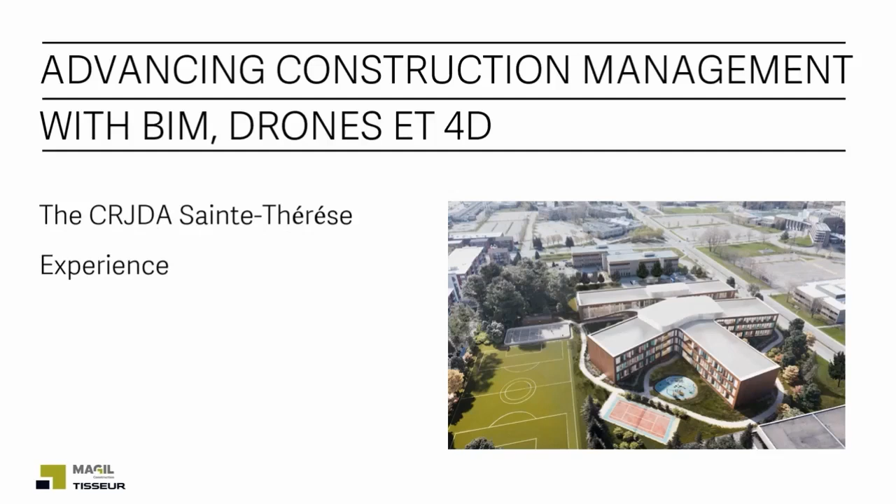Before starting, I'd like to introduce myself and my company. My name is Federico. I am currently the Vice President of Technology for Fayolle, a construction group which owns several construction companies. One of these is Magil Construction, our general contracting and construction management company. Magil was founded in Montreal in the 50s by Louis Magil, an immigrant from Eastern Europe. Over the years, we participated in the construction of a good part of downtown Montreal, as we can see in this map.

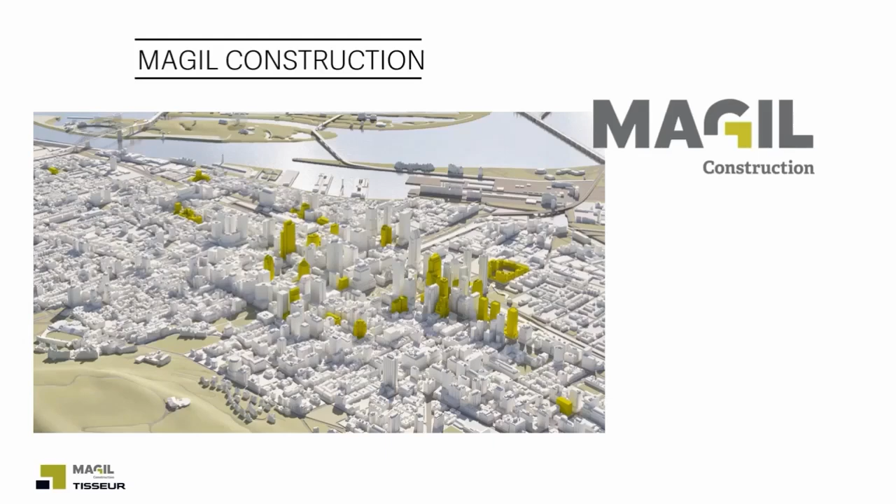Since Fayolle's acquisition, we've been expanding and now have offices in Ontario and BC. For this project, Magil partnered with Tisseur, forming a joint venture that allowed us to combine our expertise and tackle the unique challenges of the CRJDA Sainte-Thérèse. Tisseur is a Quebec-based contractor and shares many similarities with us — our values, our approach to construction, and even many of the same digital tools. However, their strong infrastructure expertise made them the perfect partner for this project, complementing Magil's strength in complex building construction.

This partnership is not a one-time collaboration. We already have several joint ventures on the way and anticipate even more in the future. In today's construction industry, where projects are increasingly complex and large, joint ventures are becoming a necessity, allowing companies to pool resources, share expertise, and expand their capabilities to take on more ambitious projects.

Let me say, however, that our joint venture is more than just the sum of two companies. It is a true collaboration, an example of how two firms can integrate their knowledge, tools, and best practices to deliver something truly exceptional. The CRJDA project is a testament to this, a project that neither of us could have executed as effectively alone, but was made possible through this partnership.

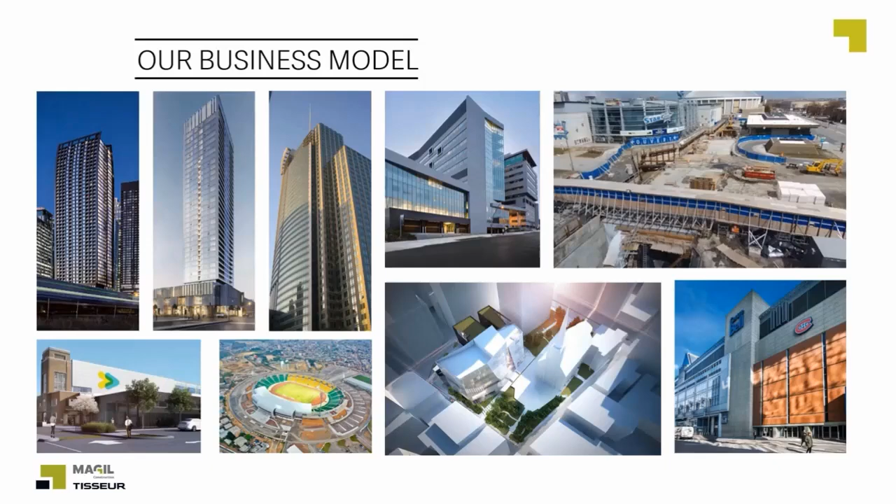So Magil does not own facilities. We don't own equipment, heavy machinery, materials. Our assets are instead knowledge and expertise, which are held by our people, either our employees or the companies we work with to execute our projects.

This is important in order to understand our vision for technology in construction. A construction project is not the product of a single company. It is the success of a team made up of dozens of companies, clients, consultants, subcontractors, suppliers, specialists. As a construction manager, our role is to act as the conductor of an orchestra, ensuring that all these different players are aligned and moving toward the same goal. That's why, for us, technology is about helping people to communicate, collaborate, coordinate. It's about giving teams better tools to understand the project, anticipate challenges, and make informed decisions.

Consider that construction is fundamentally different from manufacturing. In a factory, the prototype and the final product are identical — you test, adjust, and then mass produce. In construction, there is no prototype. The first time we build something is also the last. Every project is unique, every site is different, and every schedule has its own constraints. This introduces inherent risks that cannot be eliminated, but they can be managed.

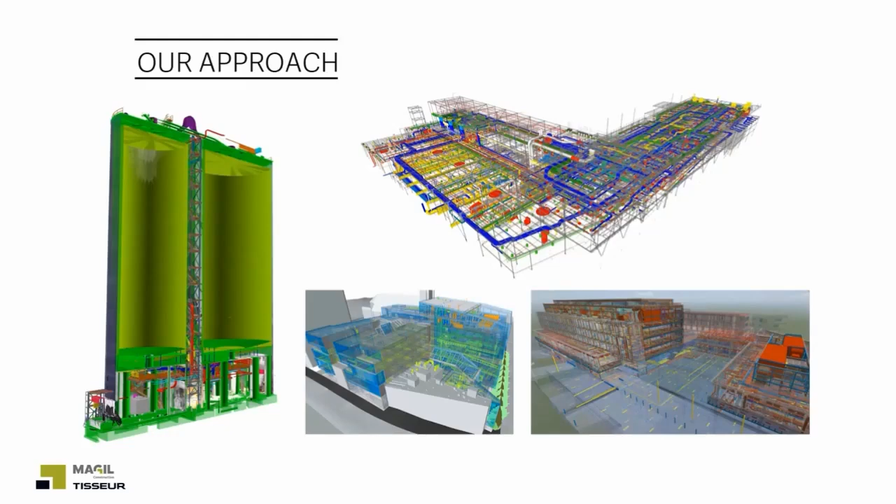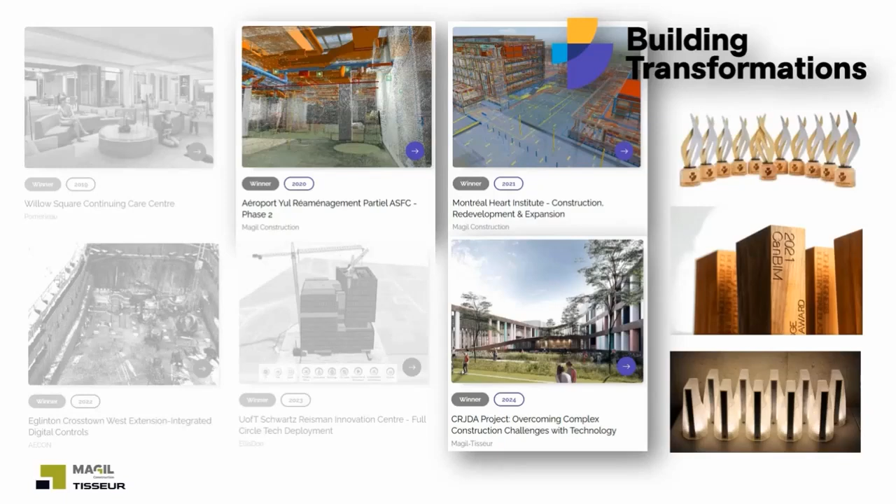Over the past 5 years, our commitment to advancing construction management has been recognized at the national level. We have earned 5 nominations and 3 wins at the Spotlight Innovation Award presented by Building Transformations in the category of construction management. This year, our work on the CRJDA Sainte-Thérèse project earned us this recognition once again. So let's now dive deeper into what made the CRJDA project stand out and how we implemented these innovative methods on site.

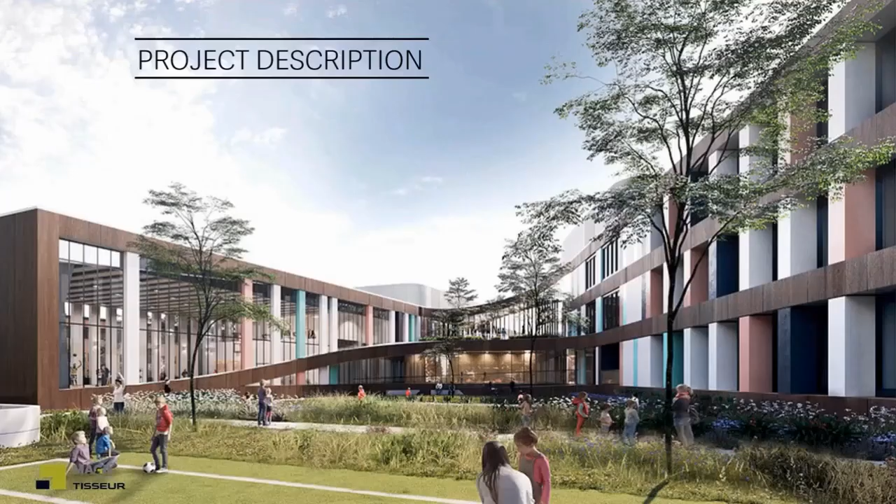The Centre de réadaptation pour jeunes en difficulté d'adaptation, CRJDA, de Sainte-Thérèse, is a 12,000 square meter rehabilitation center designed to provide a safe and structured environment for youth aged 6 to 17 facing adaptation challenges. The facility includes 9 residential units, classrooms, multi-purpose spaces, a gymnasium, an art studio, and outdoor recreational areas such as sports fields, gardens, and themed play modules.

This project is more than just a building. It is a place of transition and rehabilitation designed to support youth in their development. The architecture was conceived by ACDF, whose artistic vision focused on soft, welcoming forms that avoid an institutional feel. The building features curved structures, warm materials, and a strong connection with nature, creating an environment that promotes well-being and reintegration.

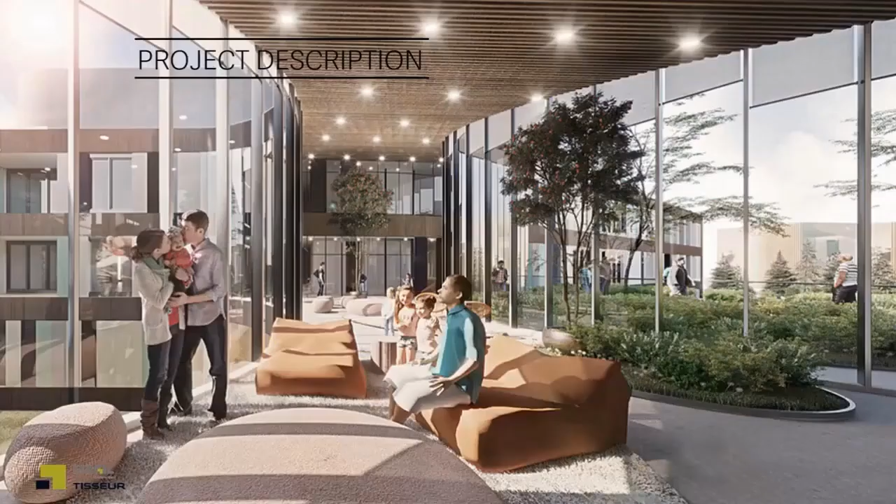The client, Société Québécoise des Infrastructures, SQI, in partnership with the Centre Intégré de Santé et des Services Sociaux de Laurentides, opted for a design-build contract for this project. This approach was chosen to ensure faster delivery, cost control, and better integration between design and execution, allowing flexibility in adapting the evolving needs of the facility while maintaining a strict schedule and budget.

One of the most significant challenges was the fast-track nature of the project. Construction began while parts of the design were still being finalized, meaning that excavation and foundation work were already underway while upper floors and other sectors were still being developed. This required constant coordination and flexibility to adapt as the project evolved.

Another challenge was the fact that, unlike a typical building with repetitive floor layouts, the CRJDA features curved forms and highly customized spaces. There are no standardized floors, and almost every section of the building required a different approach. This architectural complexity made traditional coordination methods ineffective, requiring an advanced BIM-VDC strategy to maintain alignment between the trades.

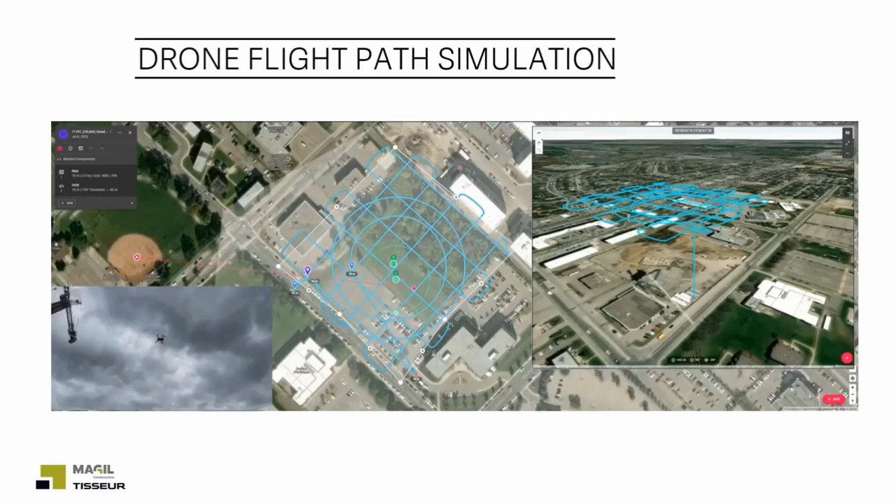Now, having drones capturing site data is one thing. Ensuring precision and consistency in every data set is another. That's where ground control points, or GCPs, came in.

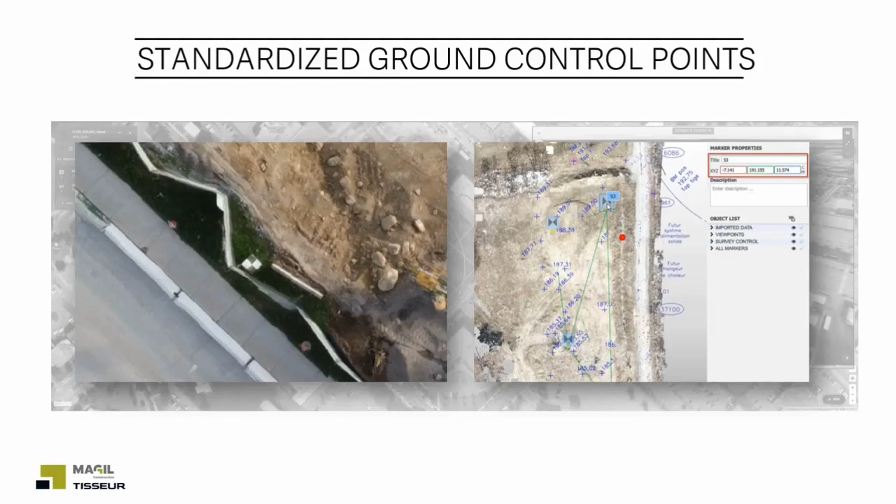We fabricated concrete mounted markers installed at fixed locations across the site. Each marker was surveyed once at the beginning and never moved. Now every drone flight was automatically georeferenced, ensuring that all datasets aligned perfectly with the BIM model. This meant that we could automatically compare new drone data to previous site conditions, integrate excavation levels and structural elements with BIM models quickly, and ensure high precision without additional surveying for every flight.

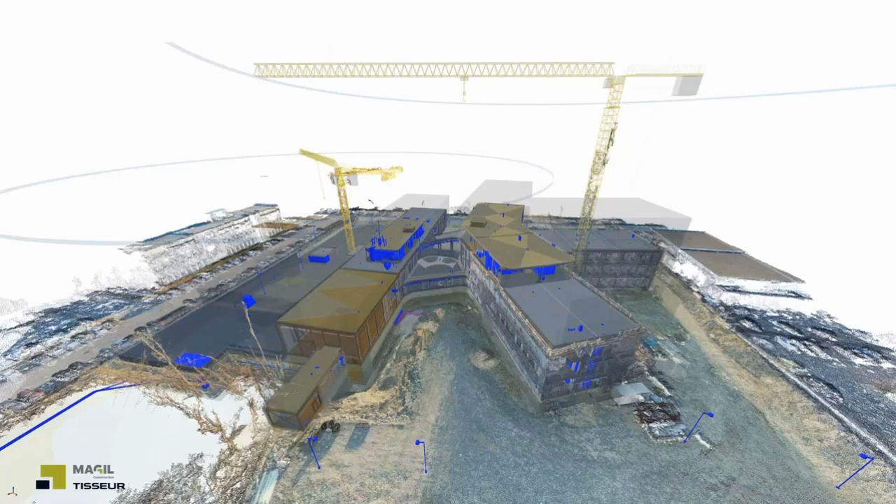Once we established a consistent georeference dataset, we integrated drone surveys directly into our BIM workflows. Every drone flight was automatically overlaid onto the federated BIM model. Excavation levels, foundation, and structures were identified against design models in real time. Potential issues, misalignment, or delays were flagged quickly.

Once drone flights were integrated into our workflow, we processed the data in a dedicated software to generate photogrammetric point clouds. This allowed us to calculate excavation volumes with precision, preventing disputes over quantities. Monitor excavation profiles and ensure alignment with design specifications, among other things.

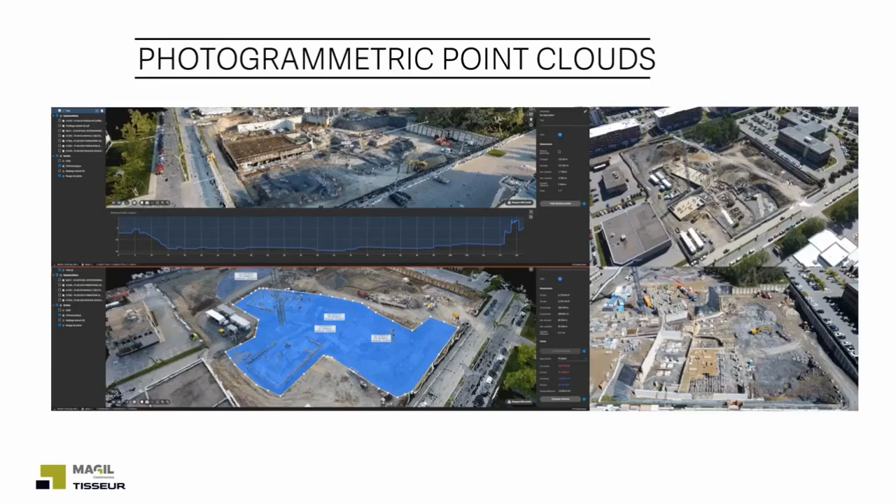We can see here on the right, two aerial views showcasing the progress of concrete foundation works. This highlights the scale and complexity of the foundation phase.

The next step was ensuring that excavation met the exact design specifications. On the right here, you see a snapshot of surveyed excavation levels. And on the left, a 3D mesh model was generated, showing the actual rock layer elevations, which ended up being, as always, different than what was expected. This was critical for verifying contractor quantity claims and ensuring fair compensation.

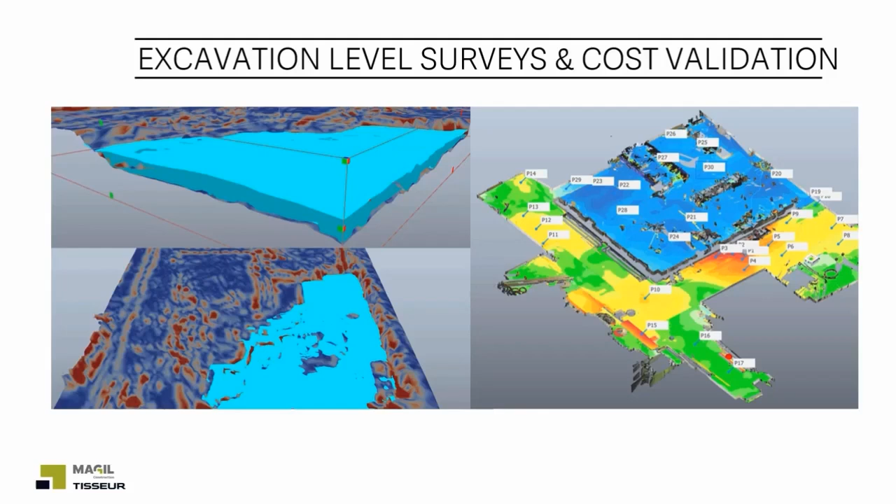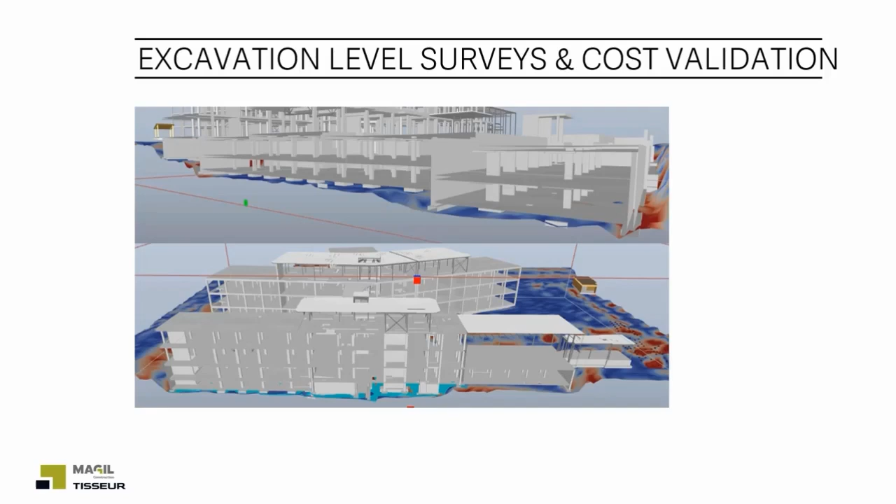Here we take the process one step further. This image shows the federation of excavation data with the structural BIM model. This ensured that structural elements were aligned with the excavation footprint before concrete work began.

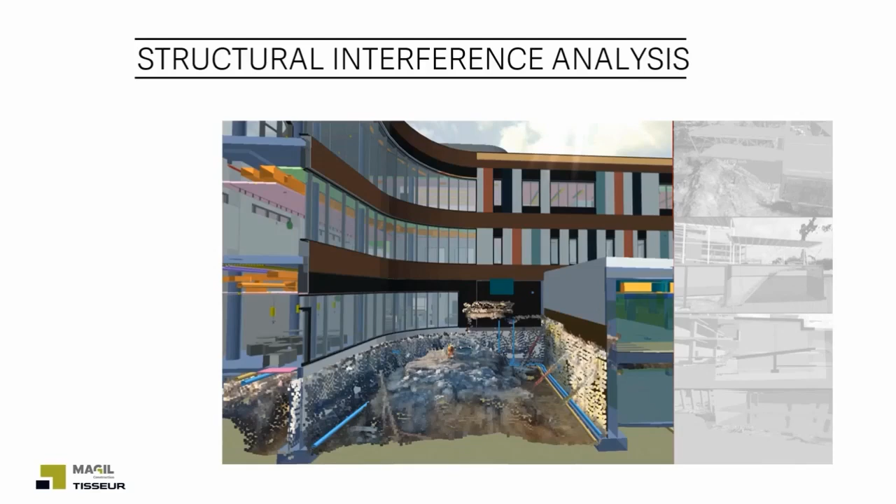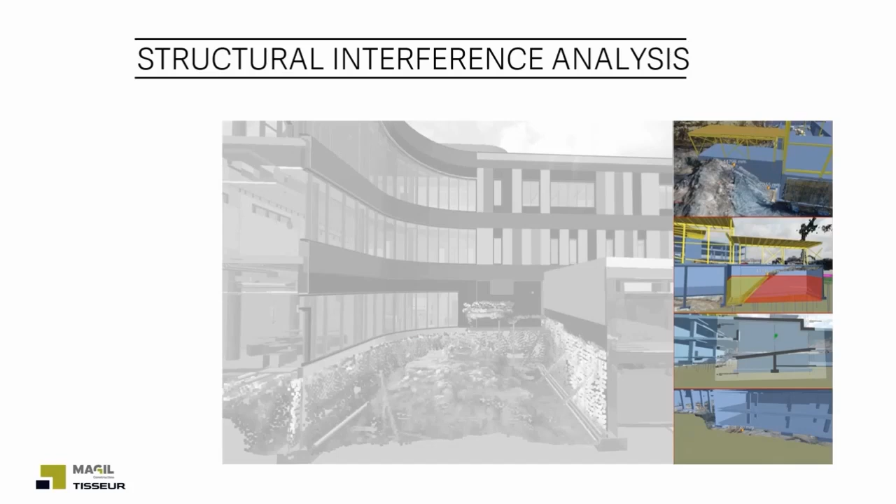In this slide, we see a fully integrated dataset where drone-generated point clouds were automatically aligned with the federated BIM model. And in the right section, we show several examples of actual applications, such as excavation slope verification to ensure safety compliance and excavation depth interference checks.

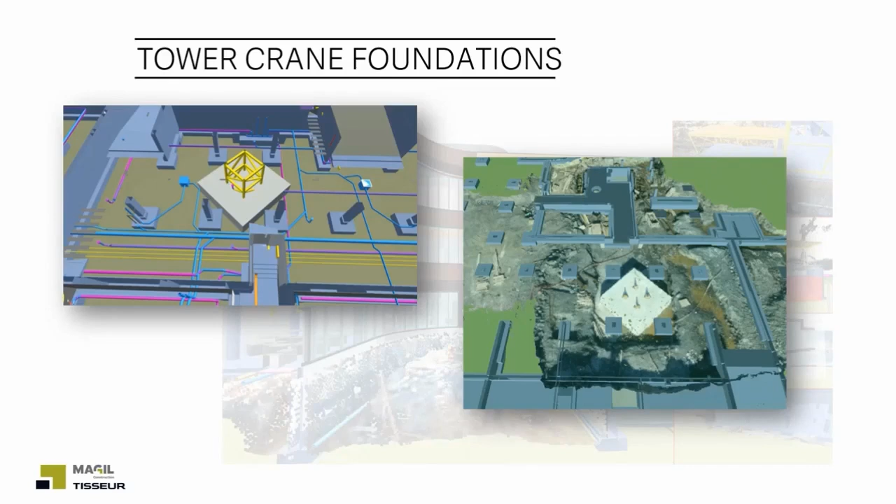A unique challenge in fast-track projects is the need for temporary structures before the final design is complete. This slide shows an example of this challenge. The tower crane foundations were integrated into the BIM model. The drone surveys ensured that placement did not interfere with the final structural elements. Using this method, we ensured that temporary structures supported ongoing work without impacting long-term construction.

One of the most complex integrations in this project was the coordination of 142 geothermal wells. The geothermal system maintains inlet water temperatures between 10 and 15 Celsius degrees, delivering long-term energy savings. This slide shows how drone imagery and 3D modeling ensured proper design and placement. Each well, 6 inches wide, 200 meters deep, was accurately positioned to maintain optimal efficiency.

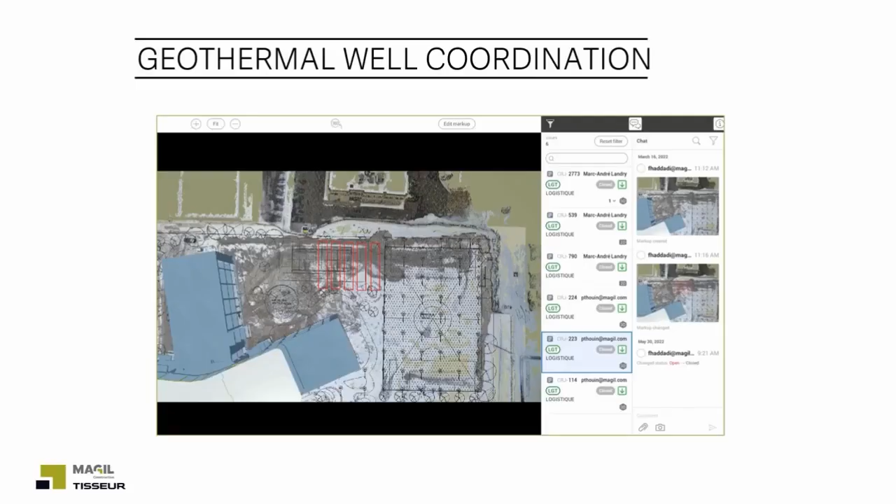Another great example which shows how powerful and cost-effective the use of BIM and drone imagery is, is the under-slab coordination, which is often poorly designed and coordinated. Design updates were directly integrated into the collaborative platform, allowing for rapid execution adjustments. With these tools, we ensured that all underground utilities and slab mechanical systems were accurately placed before pouring concrete.

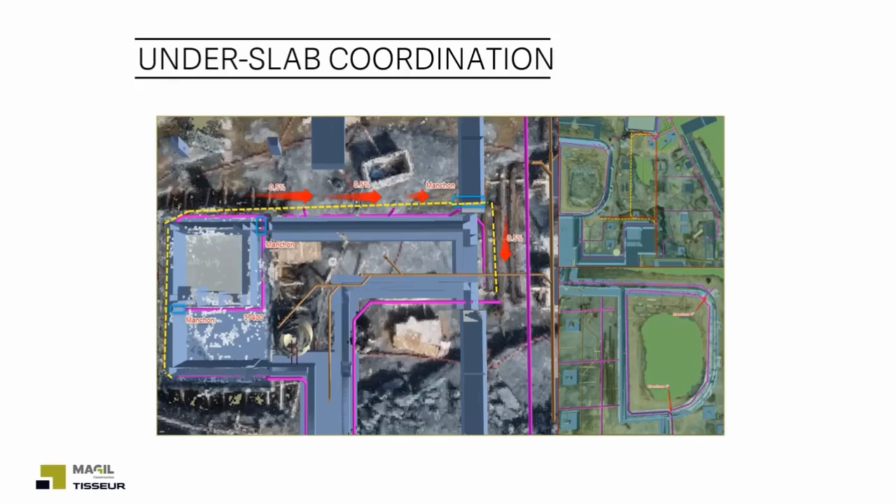Beyond visualization and coordination, drone surveys played a major role in verifying completed work for invoicing and payment approvals. In this example, the highlighted red areas indicate tracked foundation progress, with each update providing a clear time-stamped record. This eliminated disputes regarding quantities completed versus quantities invoiced, and ensured subcontractors were paid based on accurate progress tracking. By having aerial validation of foundation and structural phases, the project team improved client-contractor relationships, avoiding unnecessary delays in approvals.

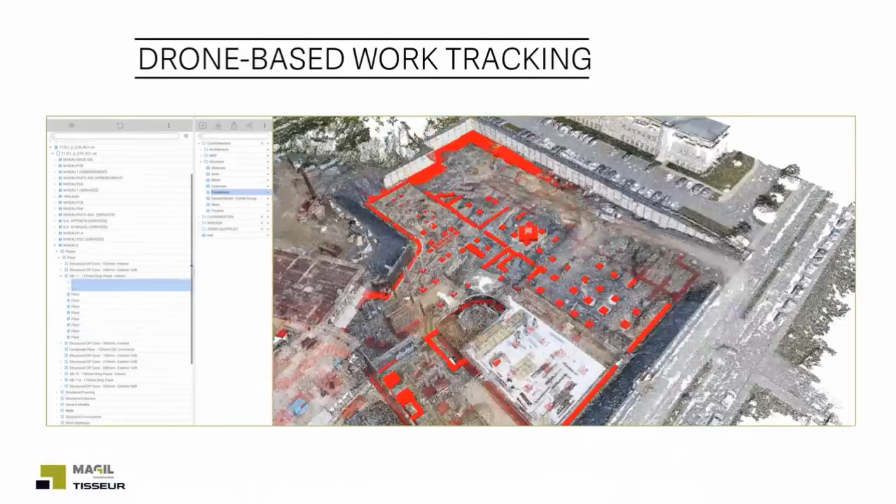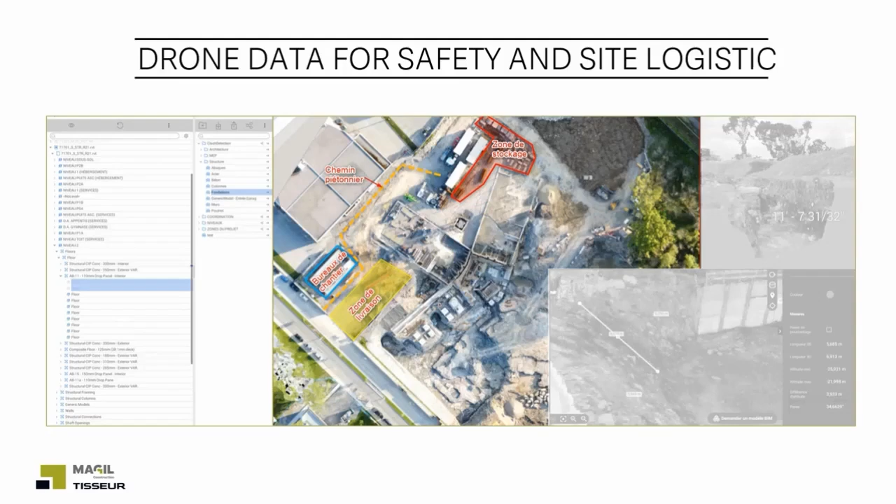In addition to coordination and progress tracking, drone data was heavily used for safety compliance. The safety team used drone surveys to verify excavation slopes, ensuring compliance with regulatory requirements. Moreover, the safety team leveraged high-resolution orthomaps captured by drones to better collaborate with the site logistics team, and ultimately to better communicate site setup, access paths, and potential hazards to stakeholders.

But managing logistics and equipment movement on fast-track projects requires more than just good coordination. It requires precise simulation and planning. We used a separate, dedicated collaborative 3D platform to simulate logistics milestones such as concrete pump reach, circulation paths, and safety zones. By testing different setups, we minimized disruption to surrounding areas while maintaining safe operations. This allowed crews to anticipate site access constraints and optimize pump placement before operations began.

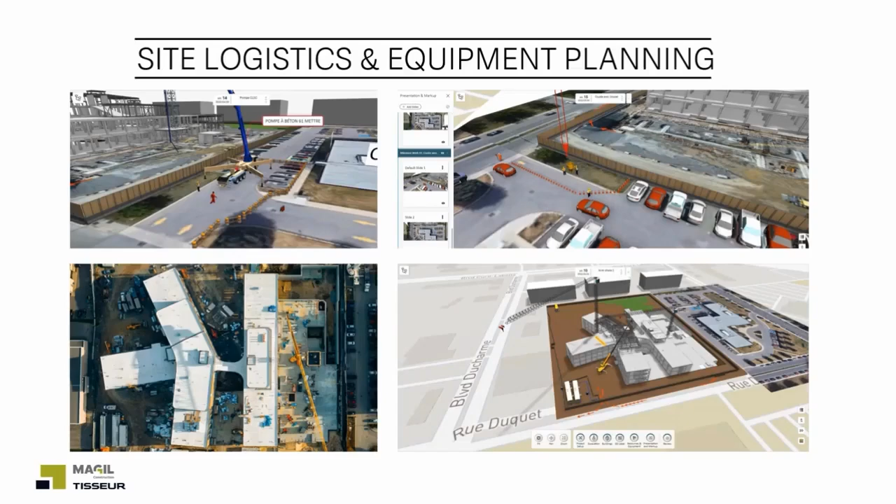Again, mobile crane coordination for the steel canopy installations, ensuring safe lifting zones. The ability to visually communicate crane operations to all stakeholders significantly improved coordination.

Here you see an aerial view showing simultaneous structural envelope and interior works. As I mentioned before, these fast-track projects required multiple activities to run in parallel. Concrete structure was still progressing while envelope installation began. Interior work started in completed sections while other areas were still under construction. Again, drones provided real-time oversight, allowing us to monitor all phases in a single dataset.

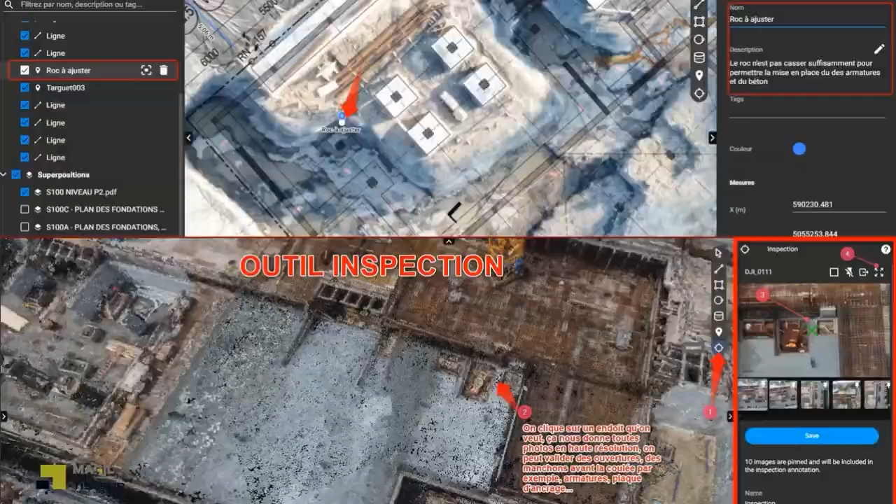Using drone imagery, we conducted systematic quality checkpoints. For example, before any major concrete pour, it was essential to validate that rebar placement, mechanical systems, and formworks were installed correctly. Another example: on the image on top, we detected additional rock to be excavated before proceeding with the foundation works. To further enhance quality control, we overlaid drone-generated orthomaps with the 2D structural and rebar plans. This provided a clear visual method to track construction accuracy.

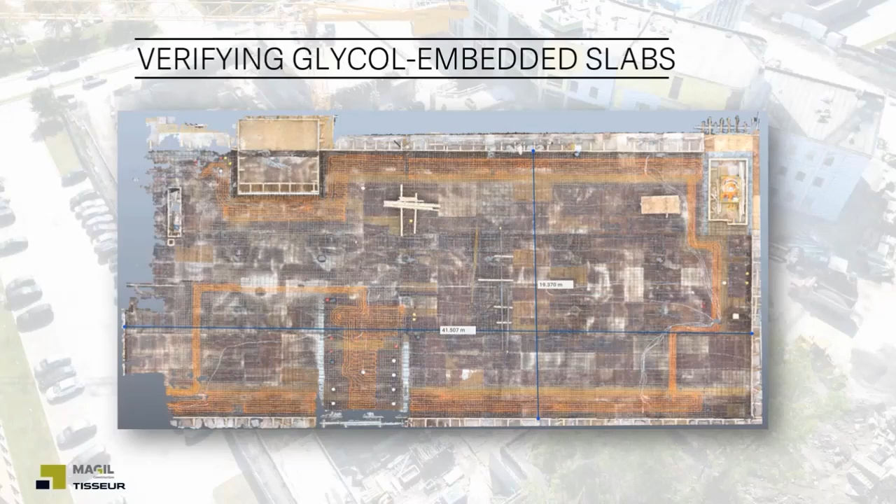Several slabs contained an embedded glycol heating system, a critical feature for long-term energy efficiency. We can see an example in this picture, which shows the high-resolution imagery used for documentation and future reference to ensure precise placement and prevent costly slab corrections post-pour.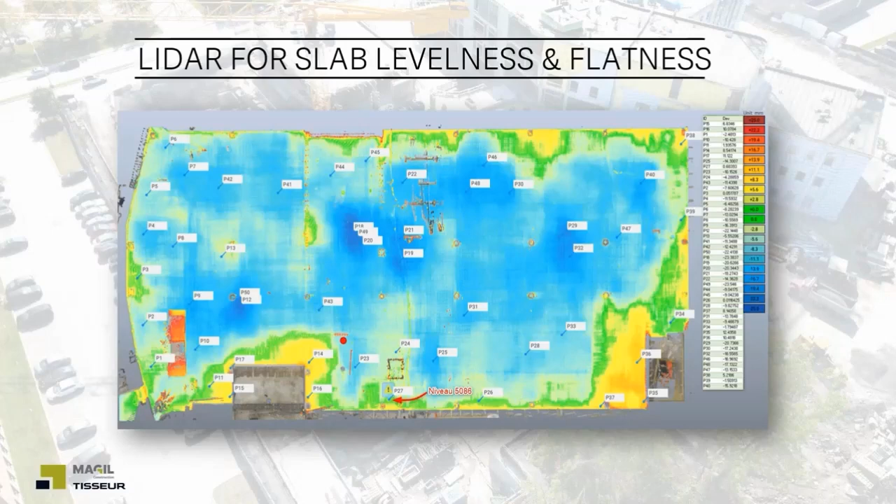Once concrete was poured, laser scanning was used to verify levelness and flatness before finishing work began. We used our own LiDAR device to scan the entire slabs with high precision, identifying any deviations from design tolerances and letting the contractor fix the situation well before the finishing works had to start.

Another example was the highly customized, non-regular curtain wall system this building featured. Ensuring precise alignment was critical for aesthetic consistency and architectural intent, but also for structural performance and weatherproofing. On top, laser scan verification was used to check structural compliance with envelope tolerances. Below, you see a photograph of the actual connection between building sections. This process eliminated misalignment risk, allowing the envelope to be installed efficiently and accurately.

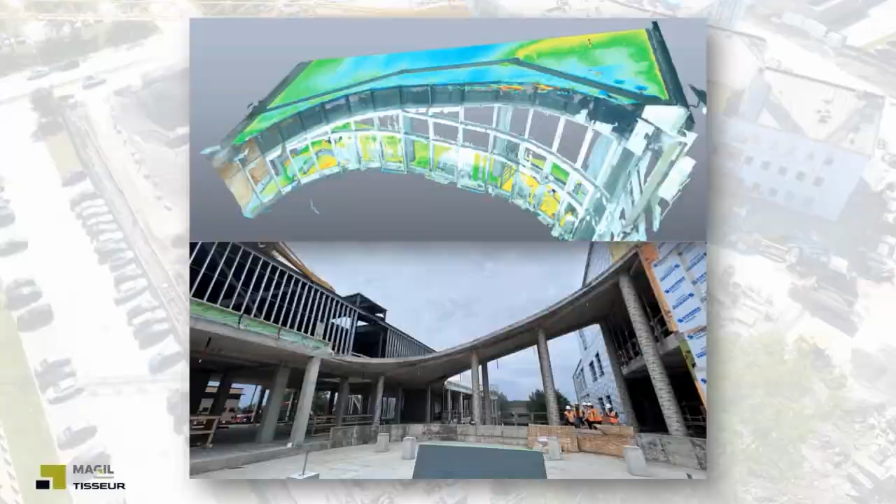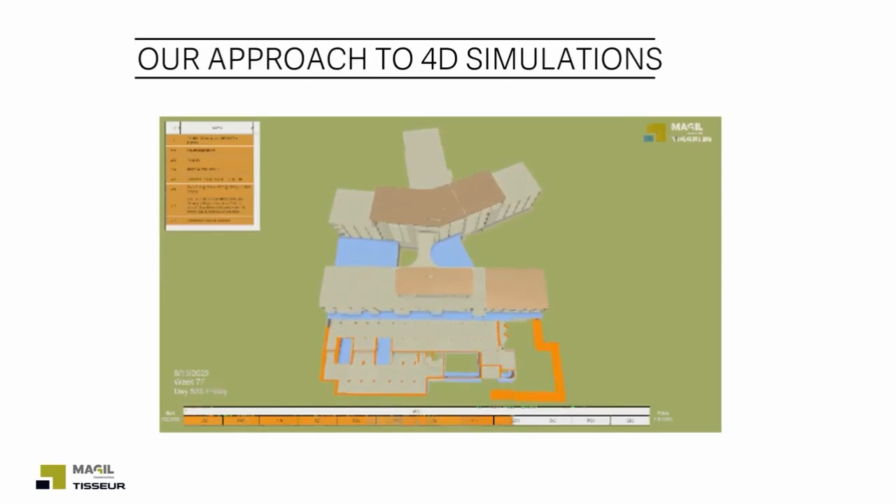4D simulations were a key tool in our project execution, not as a marketing stunt, but as a practical planning and decision-making tool. The goal was to review and optimize the project schedule by integrating feedback from specialty contractors, consultants, and the construction team. These simulations allowed teams to visualize critical path activities, helping them detect risks early and identify optimization opportunities. We initially focused on excavation, structure, and envelope at a high level, ensuring the schedule was realistic and coordinated across disciplines. But this was just the start.

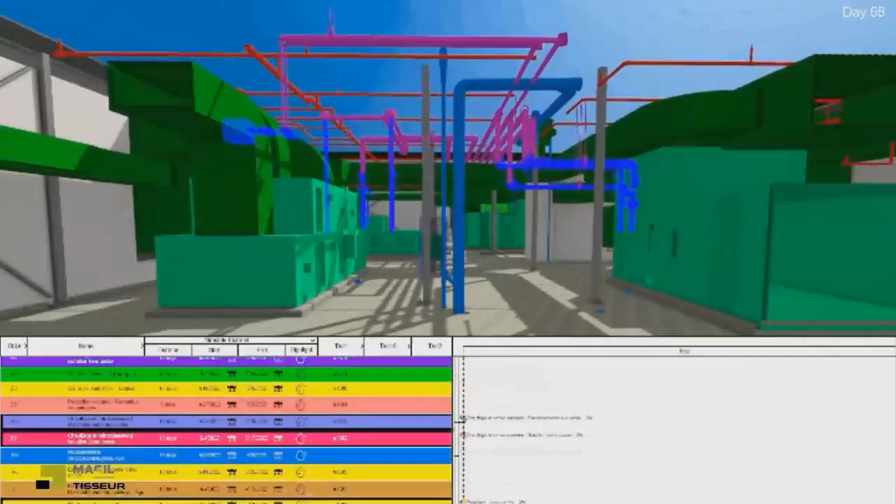While high-level 4D simulations focus on overall project sequencing, we also developed detailed simulations for complex areas like the main mechanical room. These highly detailed 4D models broke down installation sequences step by step, ensuring that every trade knew their role. The simulations helped assess the impact of design and coordination decisions on the schedule. Color coding was standardized to match our coordination templates, providing visual consistency and better communication.

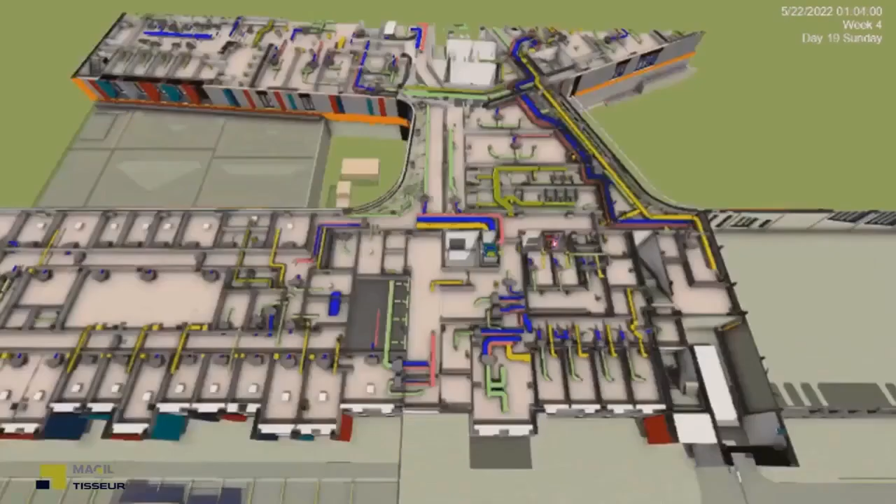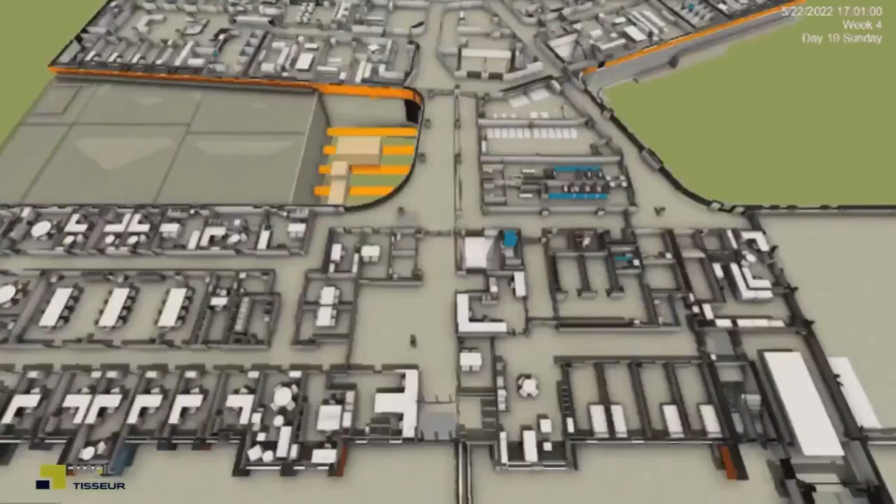Beyond schedule planning and coordination, 4D simulations were also used to model the movement of large mechanical equipment throughout the site. These simulations optimized path selection, ensuring equipment could be transported with minimal disruption to ongoing construction. Potential obstructions were identified in advance, allowing teams to coordinate around scheduled deliveries and avoid conflicts. This visual representation of logistics planning significantly improved communication with contractors, helping them better prepare for future site activities.

These simulations were also an effective tool for communicating safety measures and risk margins to the client. The ability to demonstrate logistical plans in a clear visual format helped build confidence and align expectations. This way, we avoided unnecessary costs associated with excessive safety measures.

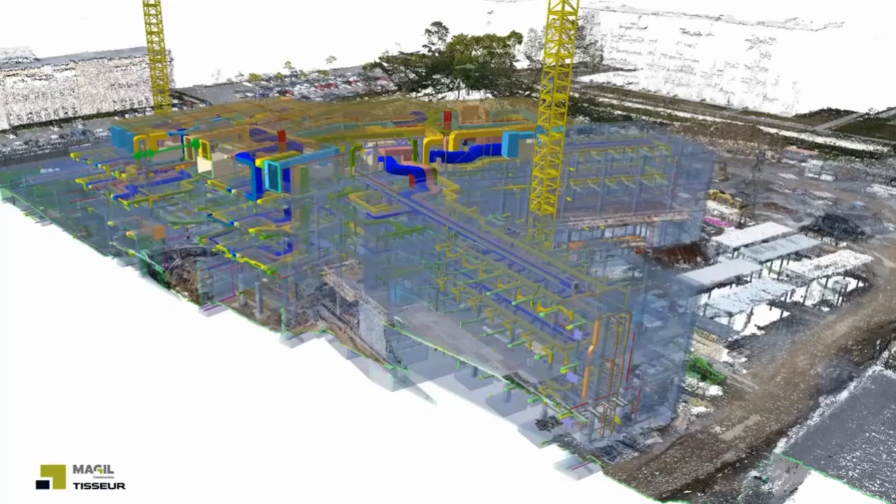I already said how this project was special to us because it was only our second design-build project and the first of this scale. Design-build offered a unique opportunity to not just execute a design, but to optimize it and push value engineering to the limit. Unlike a traditional approach where contractors receive a finalized design, here the design team, consultants, and key subcontractors were fully embedded in our workflow. This meant that we could apply all the experience and expertise we had built in our department, ensuring that proactive use of BIM-VDC and digital coordination directly influenced decisions from the earliest phases.

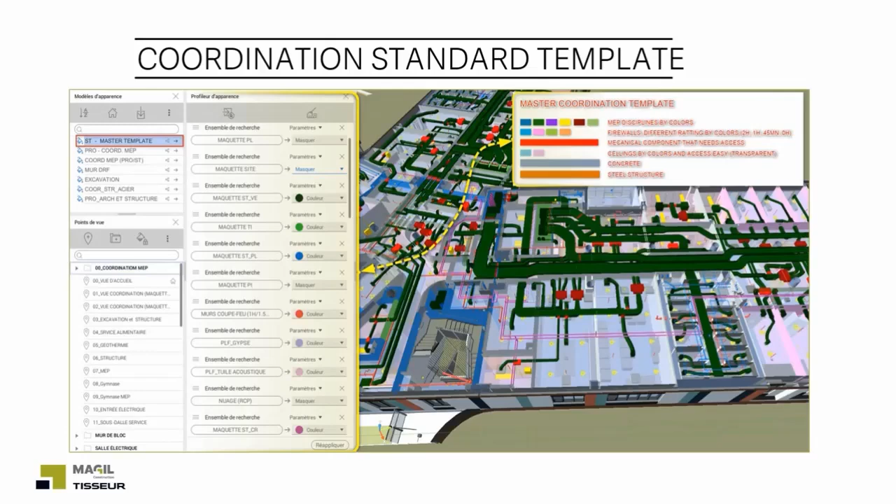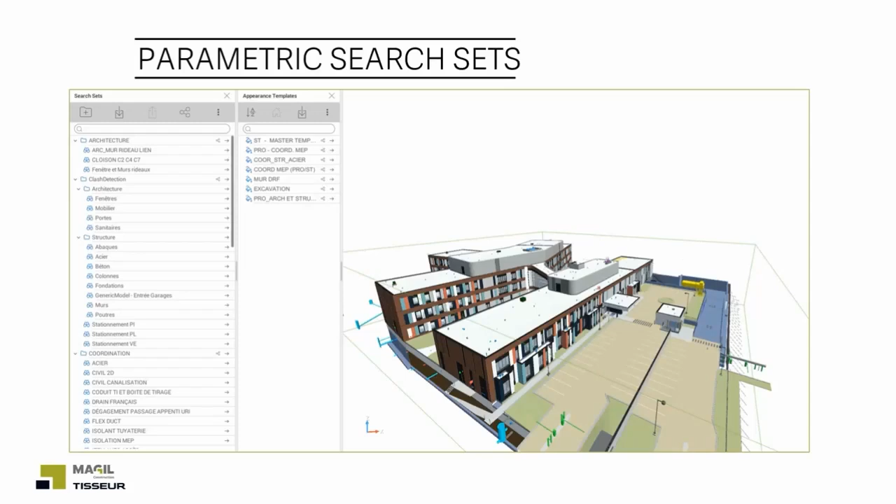First, we implemented a standardized color system for all disciplines. The same system is applied across all our projects, which results in faster coordination meetings and clearer understanding for all teams. Our coordination workflow leveraged 162 parametric-based search sets and 7 different appearance templates. These tools allowed us to instantly filter and analyze the model based on specific coordination needs. Quantity takeoffs, constructability reviews, and work tracking have been made easier this way. A total of 44 standardized clash tests were set up and run frequently, ensuring that design modifications and coordination changes were immediately validated across all systems.

When an issue required direct client input or contractual clarification, it was escalated into our project management RFI module. This ensured that critical issues were not just discussed internally, but were properly documented and tracked.

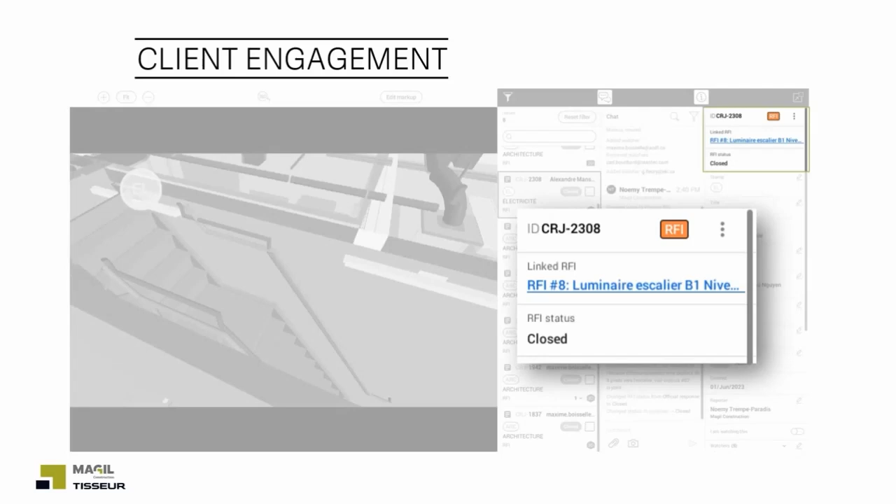While these tools are powerful, they are only one part of a comprehensive coordination workflow. While clash detection remains a crucial instrument, our coordination workflow starts with human-driven virtual coordination reviews. Before running clash tests, we conducted virtual walkthroughs of each sector, identifying issues that automated clash detection might miss.

Not all clashes are equal. A large geometric conflict might be insignificant, while a minor routing issue in a critical path zone could have major schedule implications. Experienced coordinators assessed issues in the context of schedule, deliveries, milestones, building code, and asset management requirements.

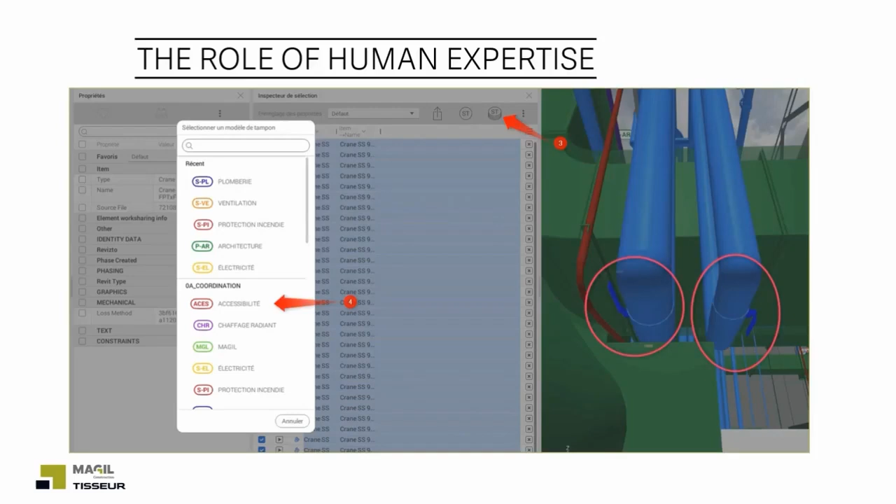This process ensured that coordination was driven by practical expertise, not just software outputs, making our issue resolution process more effective and strategic. This slide showcased real-world examples of design optimizations achieved through proactive BIM coordination.

We can see here spatial conflicts resolved before execution, MEP layouts optimized to improve accessibility, serviceability, and constructability, value engineering, which led to cost reduction by identifying more efficient construction methods. This level of integration was only possible because of the design-build framework, which allowed us to become active contributors in shaping the project.

This project required us not only to execute with precision, but also document, verify, and track every aspect of construction. The end goal was to deliver an as-built federated BIM model, which was the foundation for the 7D asset information model, a contractual requirement from the client.

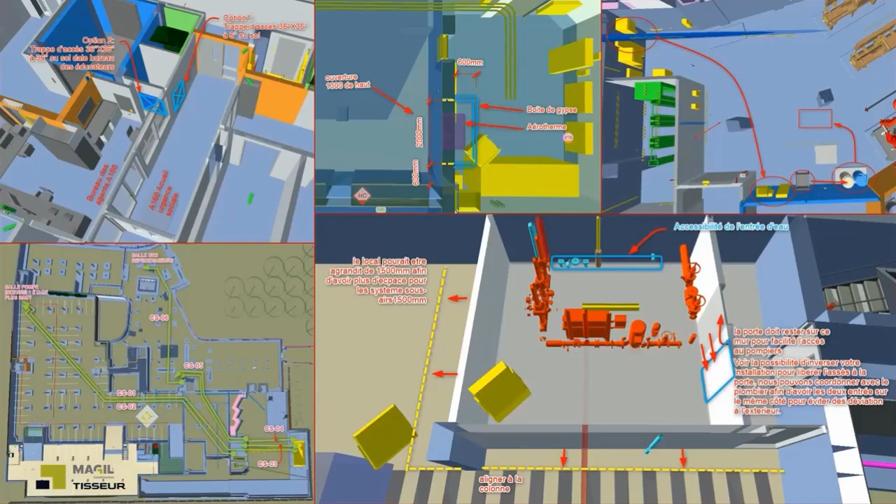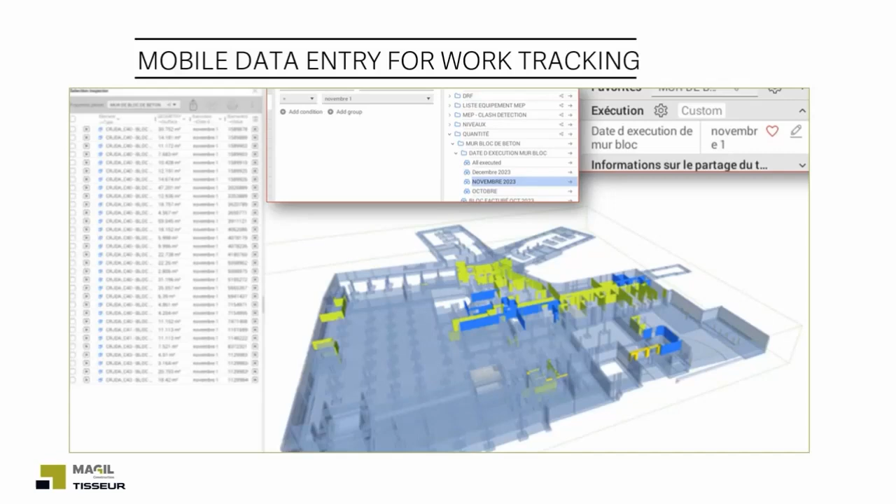The site team used mobile devices to update the BIM model with real-time work completion data. For example, here we see concrete block wall progress being tracked for invoicing, ensuring accurate expense validation before approving payments. This approach improved cash flow, reduced disputes with the trades, and expedited approvals, keeping the project financially aligned with progress in the field.

Site teams directly linked photos to issues in our collaboration platform, reducing the need for physical site presence. This improved communication between field and office teams, allowing for quicker response times to issues.

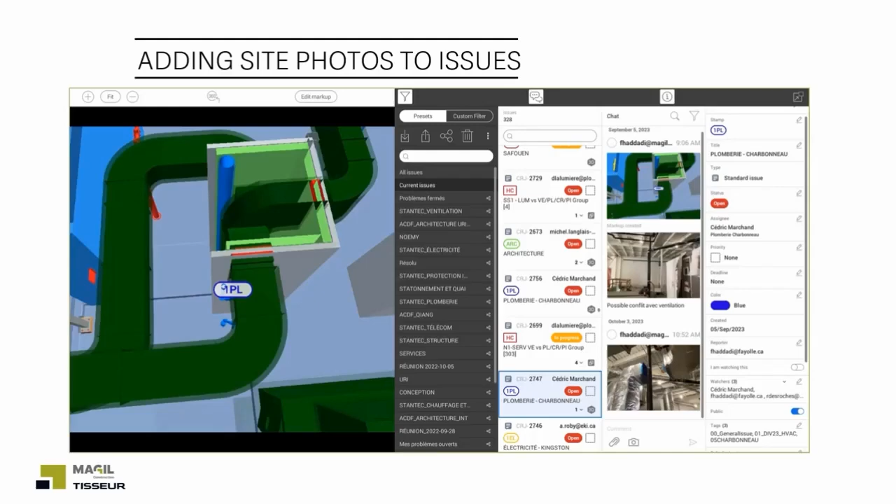QR codes were placed strategically around the site, linking to corresponding locations in Procore and issues in Revizto. Issues have an associated 3D view, which we set to correspond with the physical QR code location on site. So whenever someone scanned the QR code, the corresponding 3D view opened up on the iPad. This allowed on-site personnel to instantly pull up relevant BIM views for inspections and verifications instead of flipping through drawings.

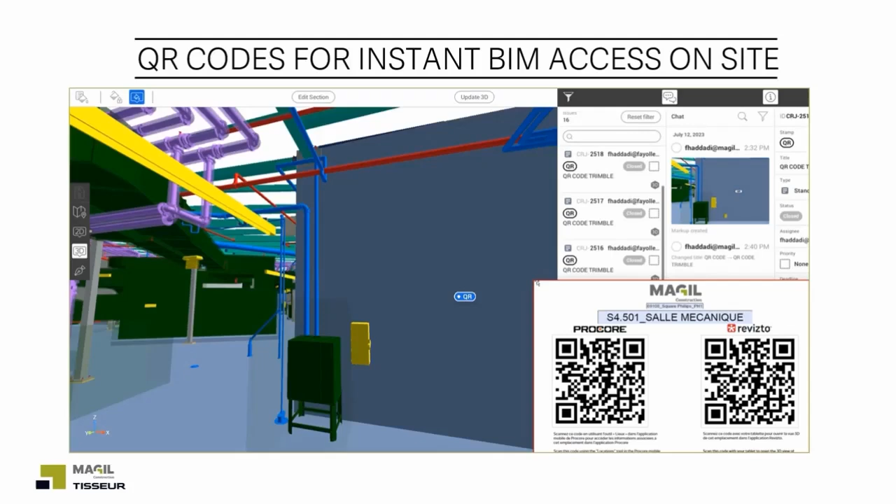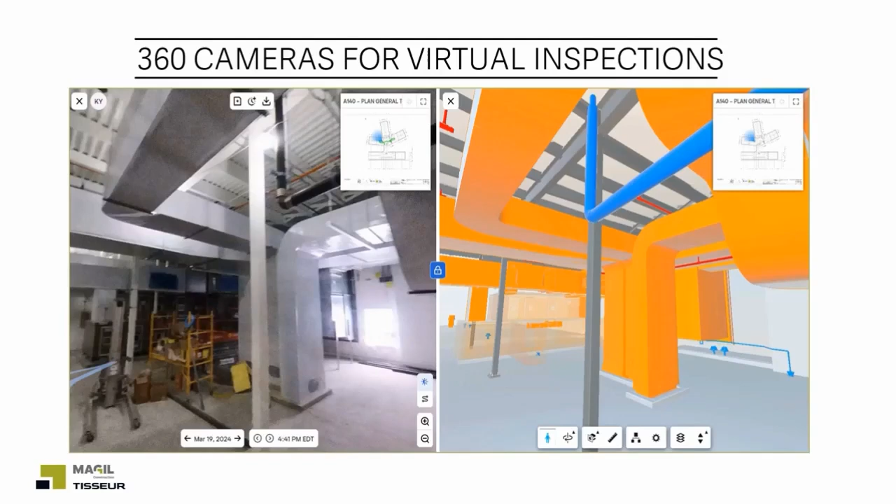360 degree cameras were often and recurrently used to create virtual site walkthroughs, for a total of 534 walkthroughs. These virtual visits allowed teams to compare executed work against the planned BIM models, ensuring alignment with design. Parallel navigation between physical reality and digital model gave project teams a clear understanding of progress.

360 virtual walkthroughs were used to spot check differences between the as-built and as-planned BIM models. Any misalignments or errors were flagged to our collaboration platform for resolution. Far from being able to check every detail, this proactive approach pushed all contractors involved in modeling to quality check their final models to be as close as possible to the works executed in reality.

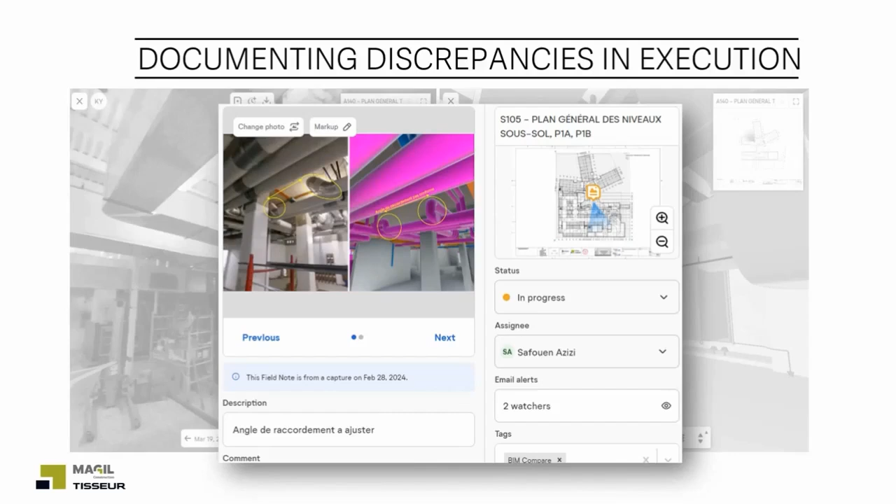The goal was to create a high-quality as-built BIM model, which is the necessary requirement for the 7D asset information model, which was the final contractual deliverable.

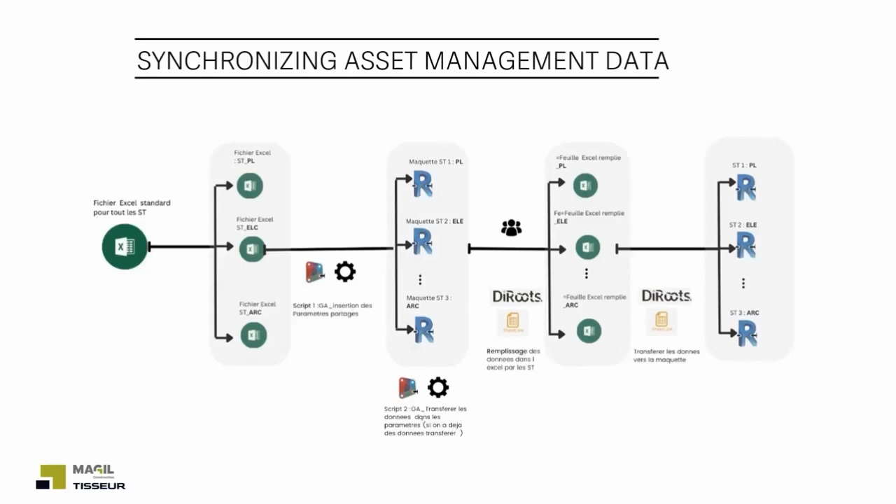Data from design teams, specialty contractors, and site execution was structured and fed into a centralized workflow. This ensured that the final BIM model was not only geometrically accurate, but also rich in asset data for long-term operations and maintenance. Asset management information was first collected in Excel form from contractors and suppliers.

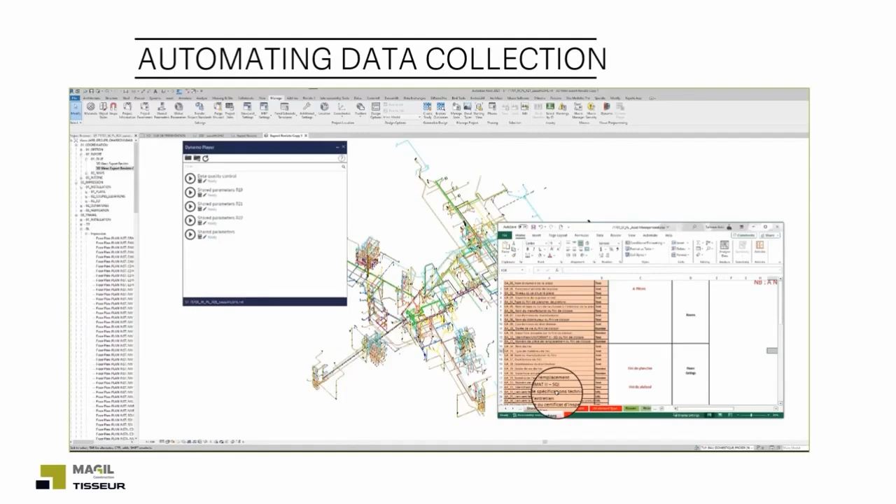Dynamo scripts were developed to automate the extraction, validation, and integration of this data into the BIM model. This process reduced manual data entry errors and improved efficiency in building the as-built model.

A dedicated Revit plugin was used to sync structured asset data from Excel back into the as-built federated model. This final step ensured that the BIM model reflected all as-built conditions, including equipment, metadata, installation details, and maintenance information. The result was a fully developed 7D asset information model ready for handover to the client's facility management team.

I want to discuss more that while the transition from construction to asset management data is a critical step, it is technically speaking pretty straightforward, and the real challenges lie elsewhere.

First, as we saw, ensuring a high quality as-built model. This is difficult because it requires continuous updates from all parties involved in modeling. If companies wait until the last minute to update their models, these updates are often incomplete. Maintaining discipline in updating the model throughout the project lifecycle is key to avoiding a last-minute scramble.

Second, defining clear information requirements from the client. For an asset information model to be useful, the client must clearly define what their asset management team needs. Ideally, the asset managers should be involved from the start, so that the Revit parameters are structured around their requirements, rather than just design and construction needs.

Once these requirements are set and the parameters defined, they need to be clearly communicated to all contractors, so they understand what data they must capture and deliver and under what form, avoiding surprises at the end. If this discipline is maintained throughout the project, rather than treating asset modeling as an afterthought, the final step of compiling the asset information model becomes as easy as pushing a button.

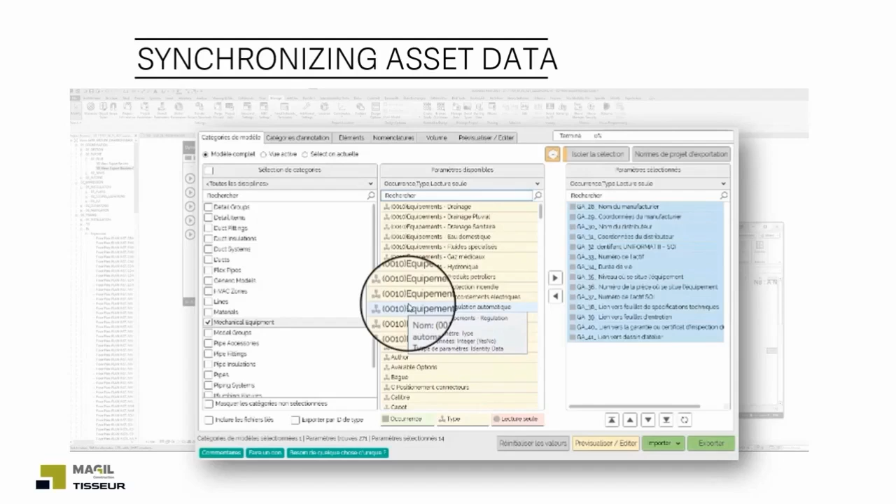So I covered a lot of ground in this presentation, but beyond the technical details, this project gave us important lessons about what it really takes to innovate in construction. Innovation in construction is not about technology alone. It's about how we apply it in a way that fits the realities of our industry. It's about discipline in execution, clear processes, and risk management rather than chasing trends or flashy tools. And most importantly, it's about aligning all stakeholders, client, consultants, contractors, suppliers, toward common goals.

This project was an example of how technology and process discipline can work together to drive real results. I really believe that innovation in construction is not held back by a traditional mindset, but it's more about risk aversion and project complexity. Like I said earlier, construction is a one-off process. Every project is different. There is no mass production, and small errors can have huge cascading consequences because of the nature of this industry. Dozens of different companies with a highly regional reach collaborating mostly on processes in series and operating on very low margin and extremely high competitive markets. This means that any innovation must reduce risk, not increase it, and that new methods need to be proven and repeatable to be widely adopted.